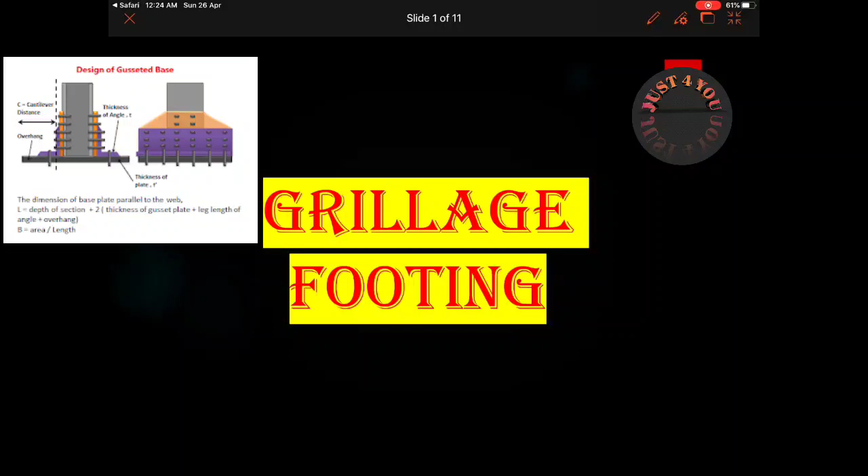Hello students, in this video lecture we will study about grillage footing. This is your last topic on the column base design of unit 3. We have studied about slab base, we have studied about gusseted bases also. For lighter loads we use slab base and for heavier loads we use gusseted base.

So why are we studying grillage footing? To answer that, I have 2 points. First, when the loads on the column are extremely heavy, like in the case of tall buildings, we need to increase the dimensions of the base plate to accommodate that load. That will not be a feasible idea to implement.

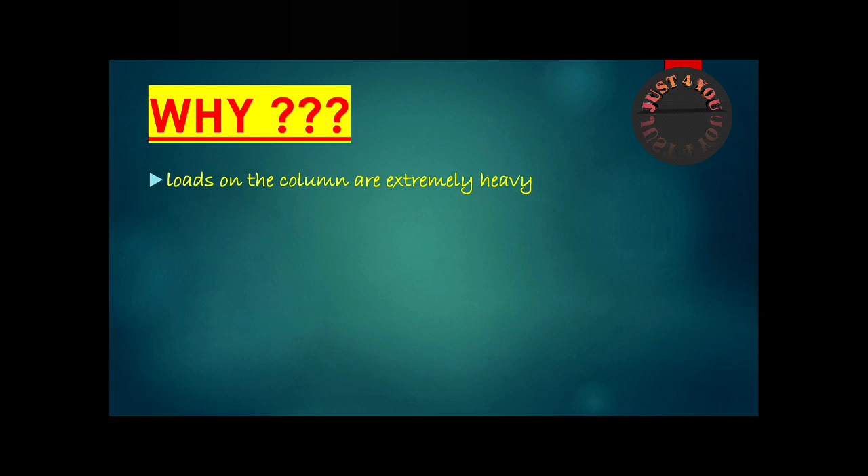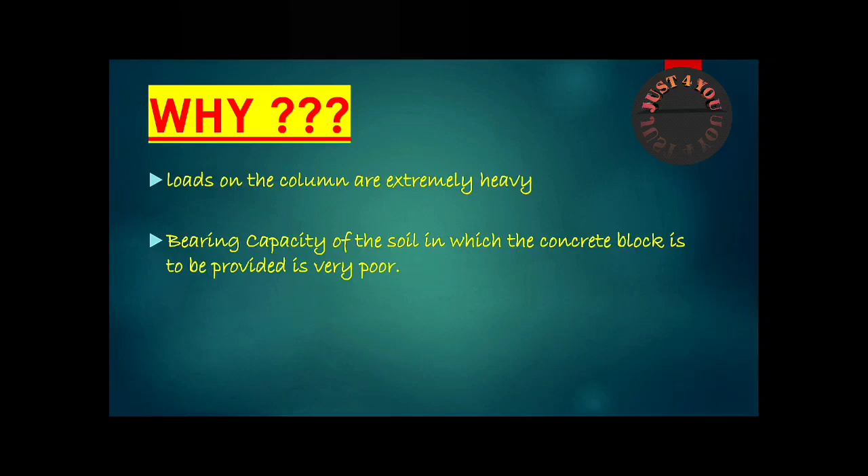Second, if the bearing capacity of the soil is poor, the concrete block placed over the soil may fail. To overcome this we need to change its dimensions or make it thicker, but by doing so we make it an uneconomical option. So based on these 2 points, we need to design a system so heavier loads can be easily accommodated with economical preference.

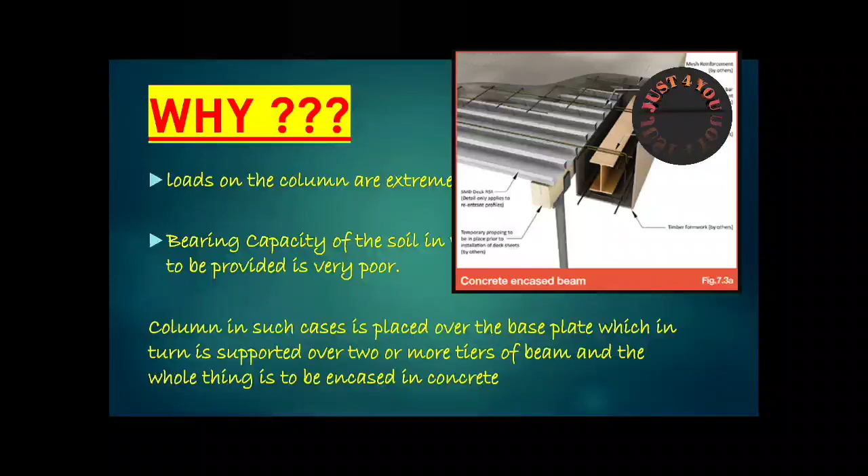So we design grillage footing. In grillage footing, the column is placed over the base plate, and the base plate is supported over a tier of beams, with 2 or more tiers of beams, and the whole thing is encased with concrete. Like your phone is covered with a case for protection, similarly the beams are encased, meaning covered with concrete, and over it the base plate is placed and the column is supported by this system.

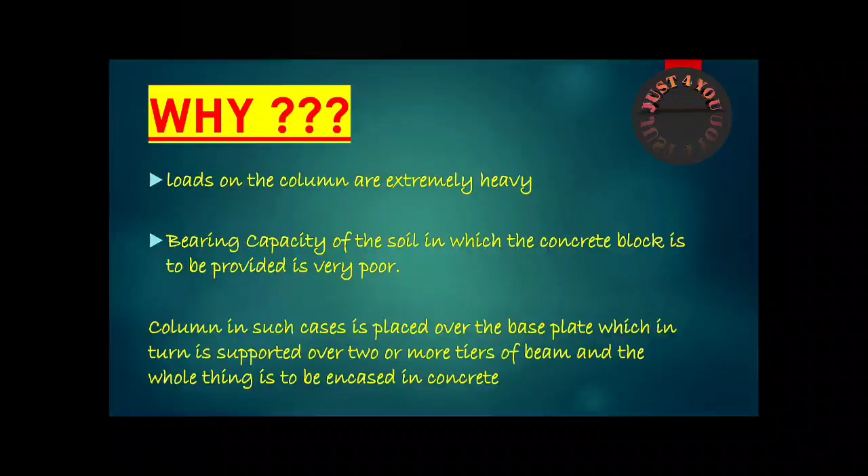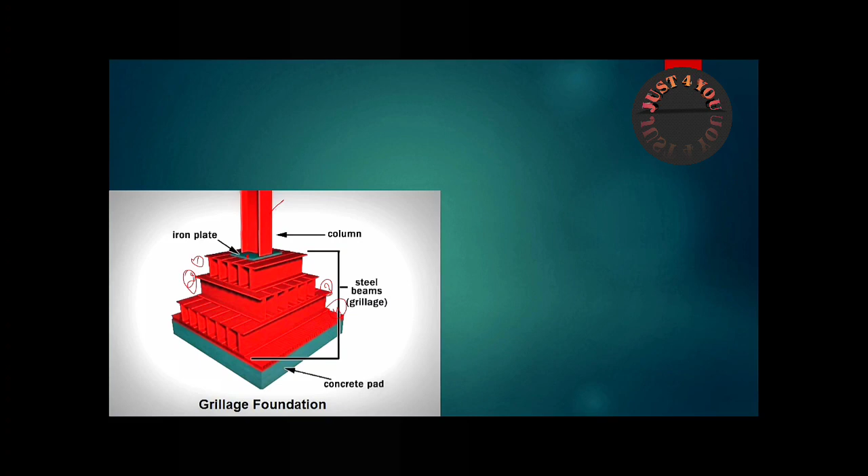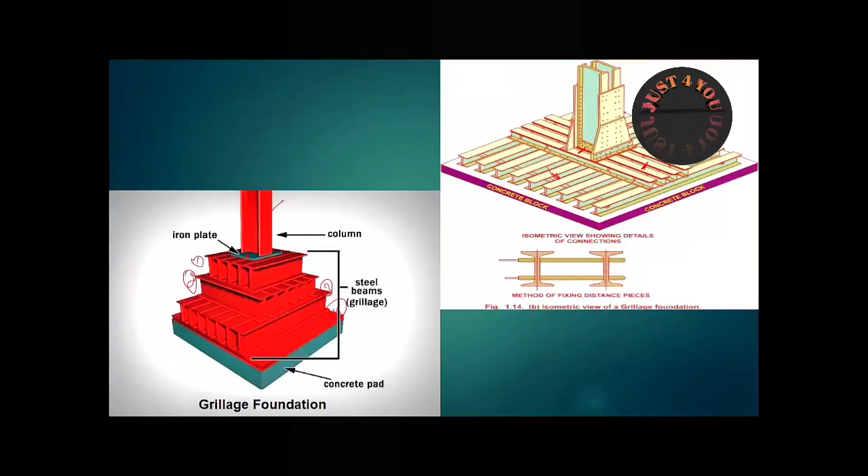Now there are some specifications given for designing this grillage footing or tier system. First, the beam should be unpainted and solidly encased in concrete with 10 mm aggregate and a working cube strength of not less than 15 Newton per mm square in 28 days. This means the concrete used for encasing the steel beams should be of strength 15 Newton per mm square with an aggregate size of 10 mm. So the minimum grade of concrete is M15, and the beam should not be painted, because otherwise it cannot bond with concrete effectively.

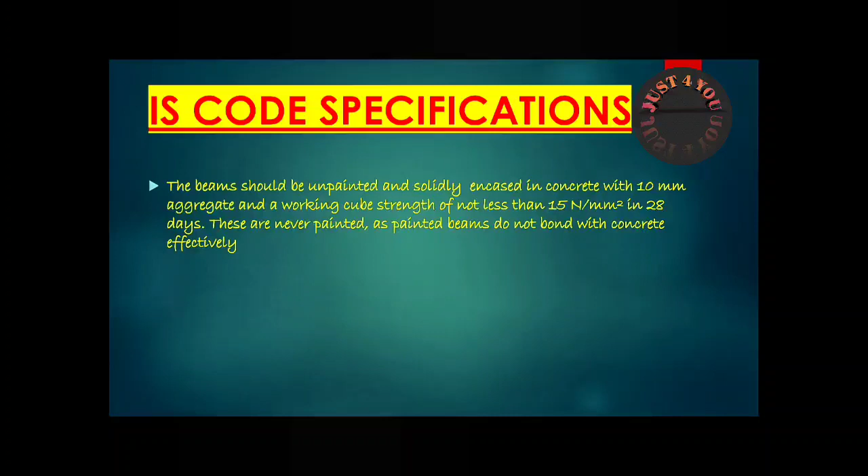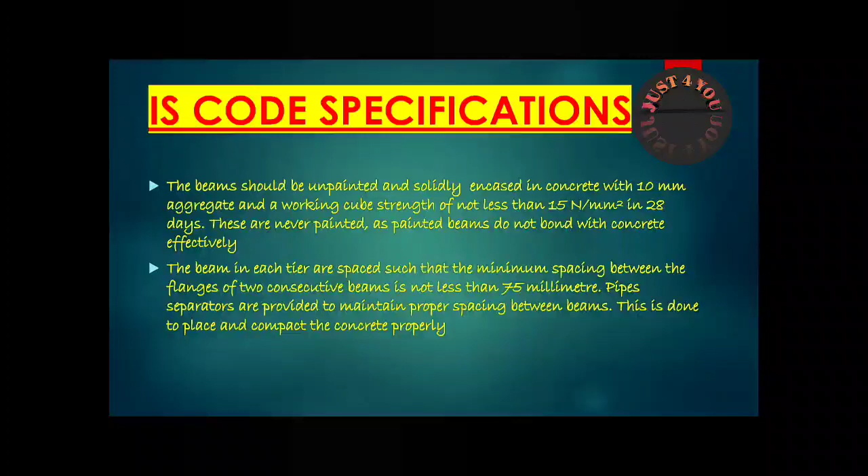The second specification is that the minimum clear spacing between 2 consecutive tier beams should not be less than 75 millimeter, and this is done to place and compact the concrete properly. The third specification is that we need to provide a cover of 100 mm minimum all around the tier beam arrangement. So these are the three specifications given by the Indian standard.

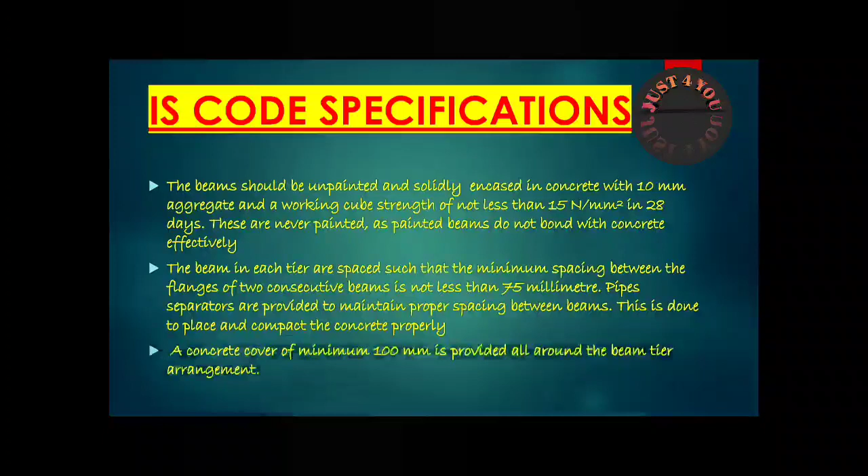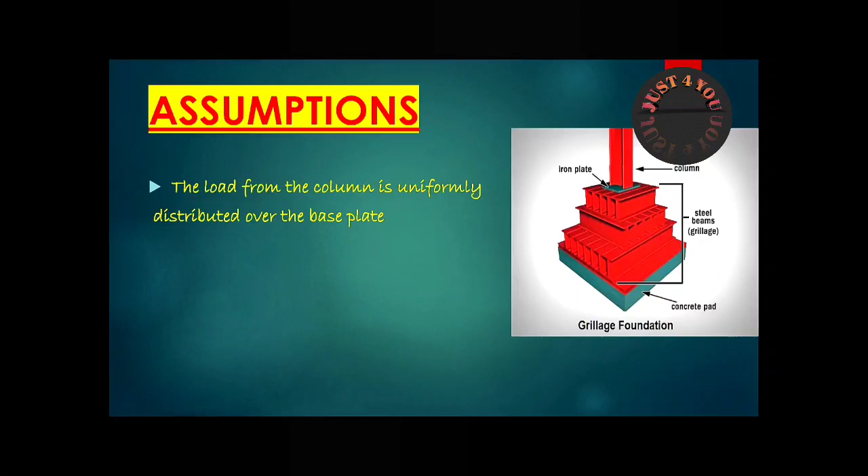Now before designing, we need to assume some points for grillage foundations. The first is that the load from the column is uniformly distributed over the base plate. Yes, all the load given by the column is uniformly distributed over the base plate. That is our first assumption.

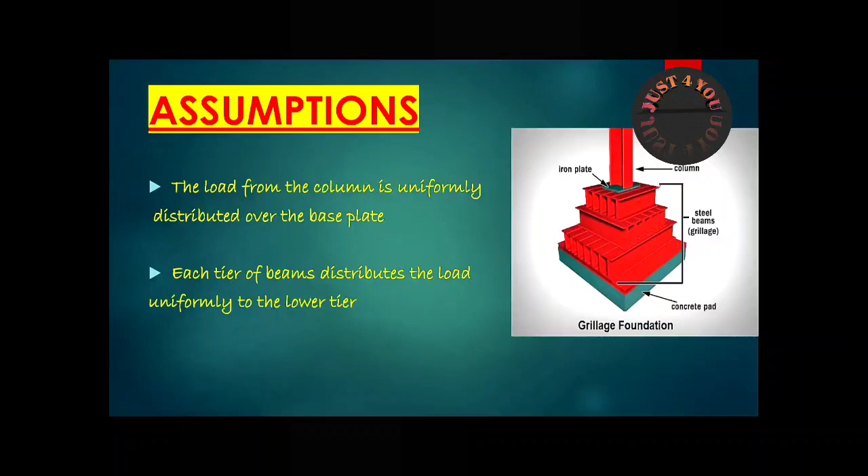The second assumption is that each tier of beam distributes the load uniformly to the lower tier. So if this is the first tier beam system, it distributes the load to the lower tier beam system uniformly. The third assumption is that the intensity of the bearing pressure is uniform, meaning the pressure from here to the concrete pad is uniform. So these are the three assumptions we make before designing.

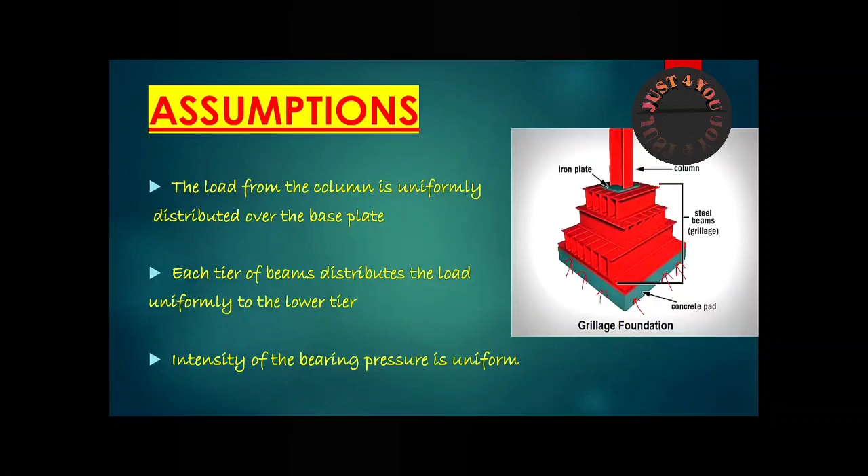Now let's go to the design part, but before that we need to understand design forces. Since we are talking about beams, there are two commonly forces that act on a beam: the first is bending moment and the second is shear force.

Similarly, for grillage foundation design forces, we can calculate the maximum bending moment for upper tier beams and lower tier beams using these equations. You can see here, these are the equations, where capital L and capital B change, and small a and small b change. Now for the nomenclature: P is the load in the column, A and B are the length and width of the base plate respectively, capital L is the length of the upper tier beam, and capital B is the length of the lower tier beam.

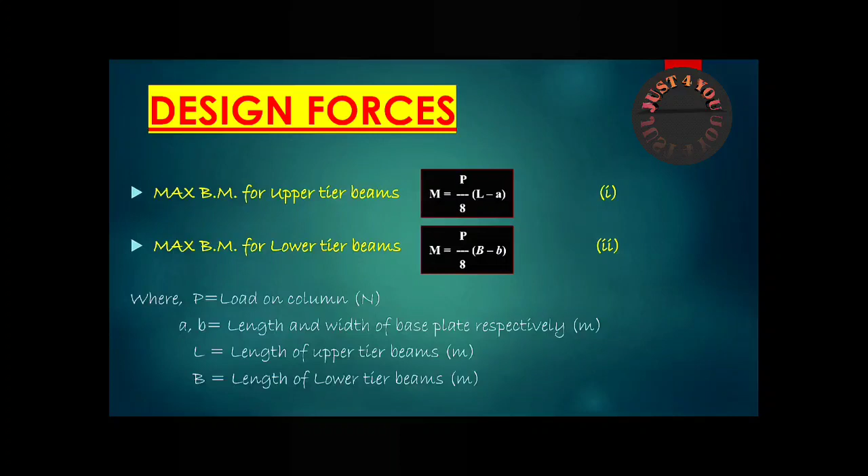Similarly, we can find the shear force. The shear force for the upper tier beam is calculated by 1/n times P/2 times (L minus small a) upon capital L. Similarly for lower tier beams, L is replaced by capital B, and the equation remains the same. Here n is the number of beams.

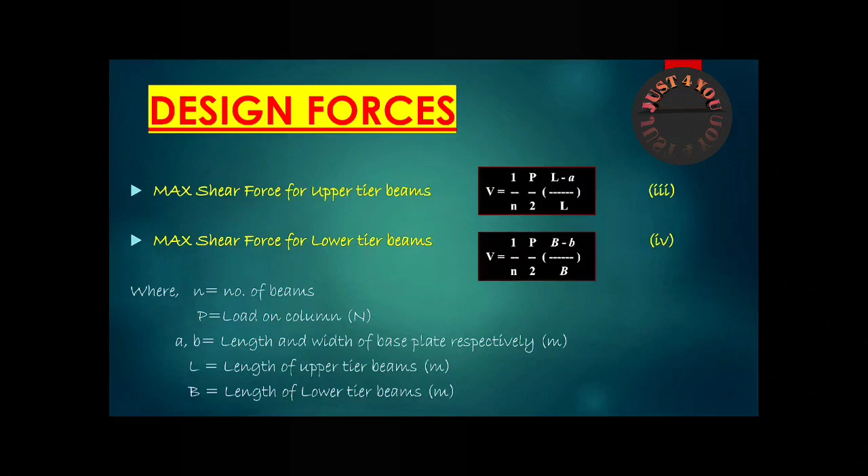So we are using these four equations in our design steps. Now let's go to the design steps.

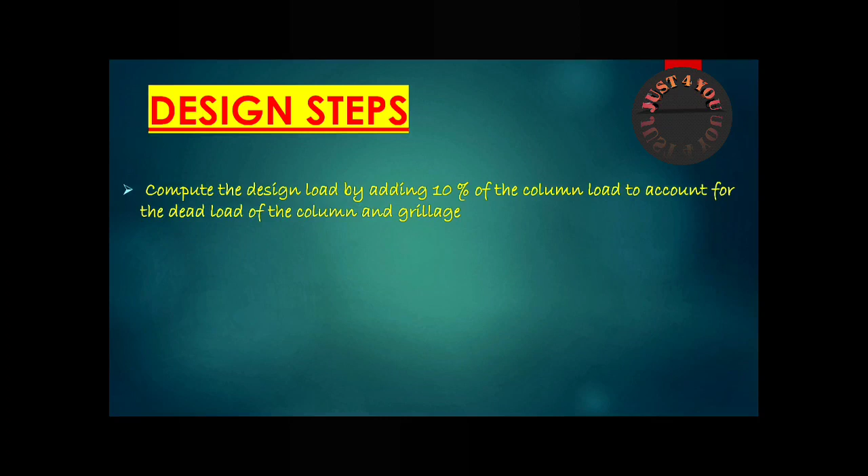The first step is to compute the design load by adding 10% of the column load to account for the dead load of the column and grillage. We need to add this 10% to get the design load.

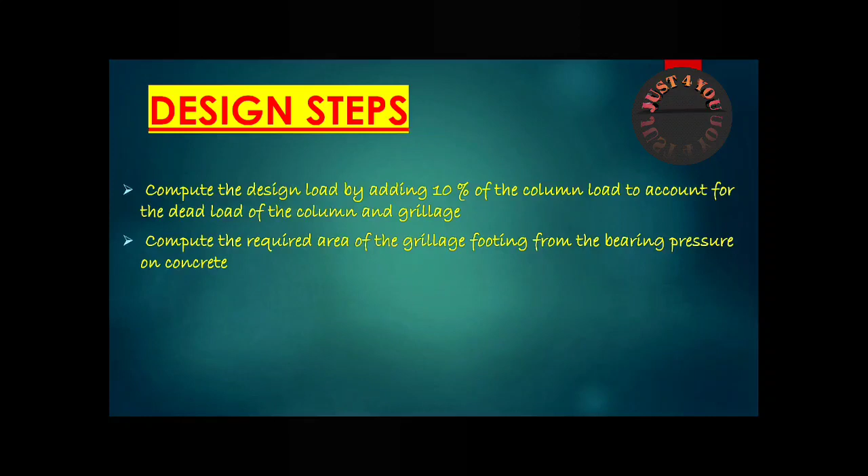The second step is to compute the required area of the grillage footing from the bearing pressure on concrete. Since in the first step we got the design load by adding 10% for the dead load of column and grillage, we can calculate the required area by dividing it by the bearing pressure of the concrete. If we provide a square base plate, we can also find its dimensions. That's how we proceed in grillage footing design, by providing a square base plate.

In the third step, we will find the maximum bending moment for the upper tier beam using equation one, that is M equals P/8 times (L minus A).

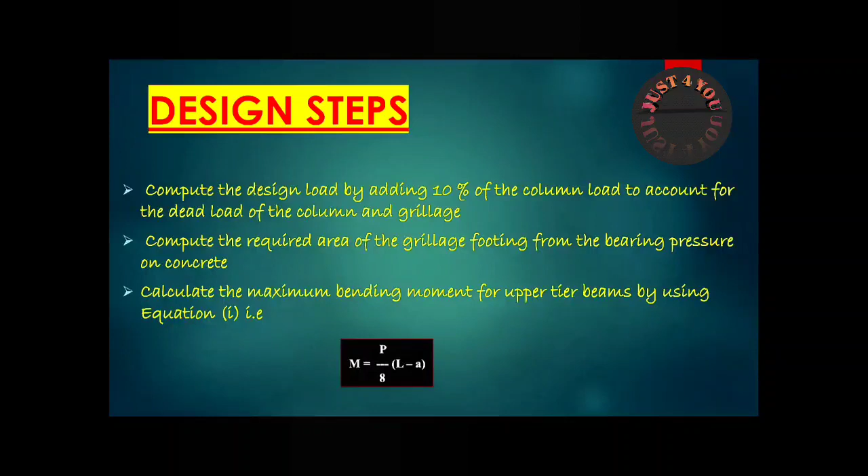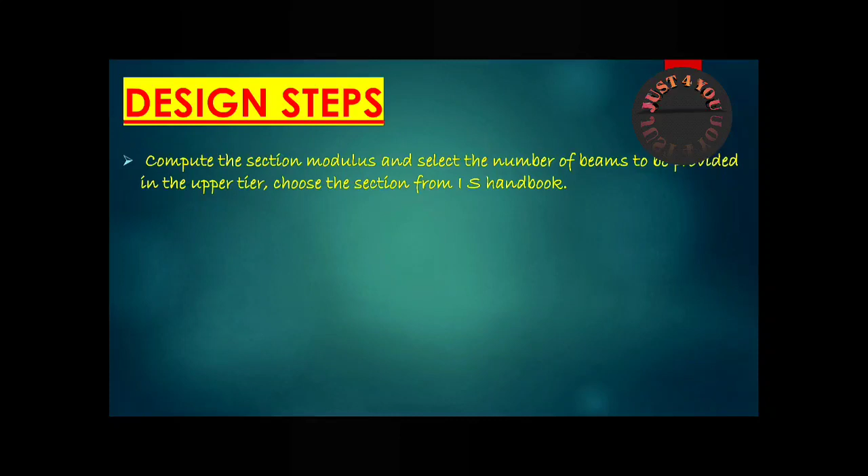In the fourth step, we will calculate the section modulus and select the number of beams to be provided in the upper tier by choosing a suitable section from the IS handbook, or steel table. This totally depends upon the section modulus.

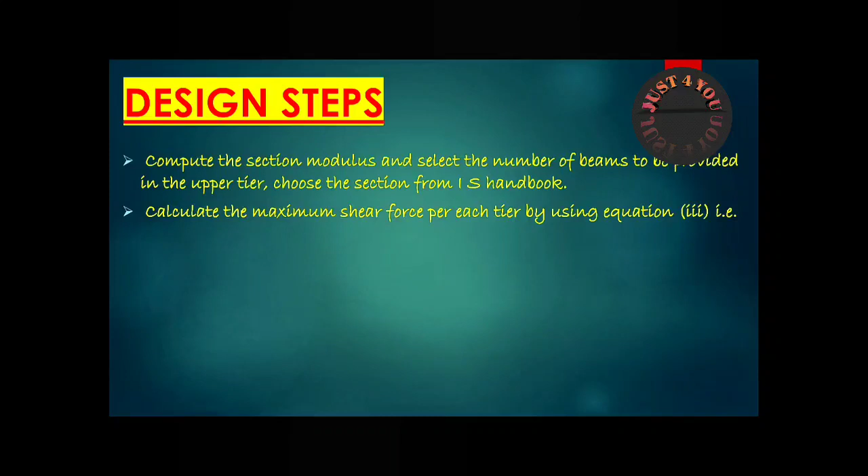In the next step, we will calculate the maximum shear force per tier using equation three, that is V equals 1/n times P/2 times (capital L minus A) upon capital L.

In the next step, we will check the beam for shear and crippling as per IS code.

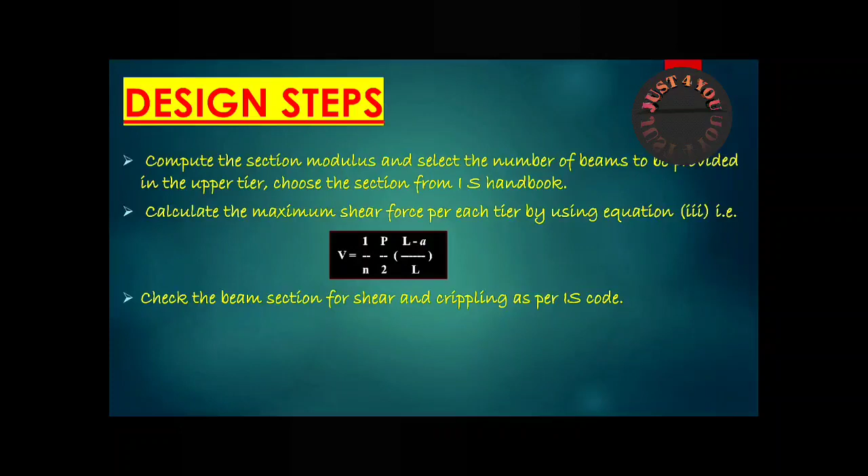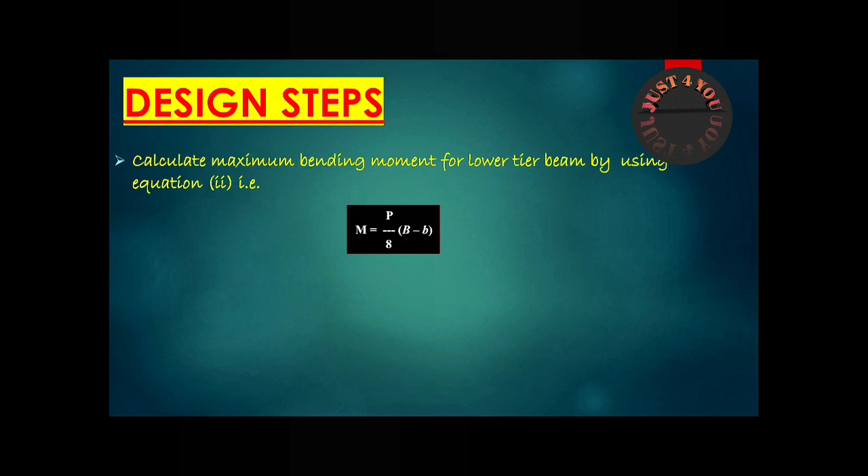Next, we will calculate the maximum bending moment for lower tier beams. Here is the equation: M equals P/8 times (capital B minus B). After that, we'll calculate the section modulus and select the number of beams to be provided from the steel table.

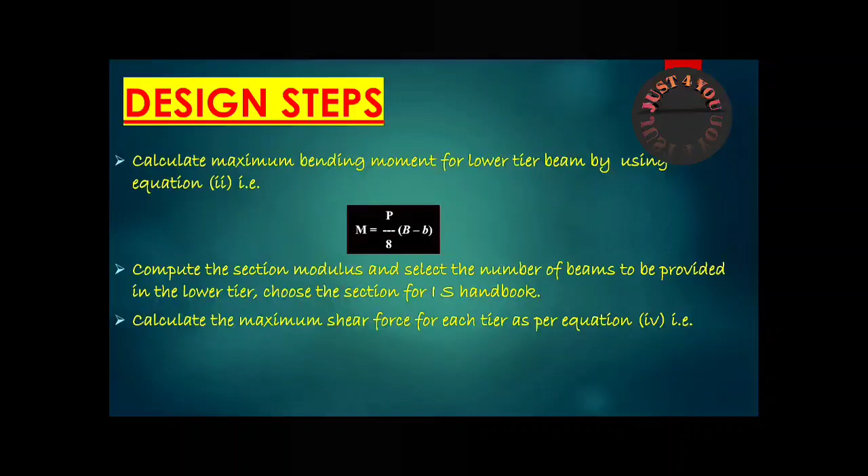Then we will calculate the maximum shear force for each tier as per equation four, that is V equals 1/n times P/8 times (capital B minus small b) upon capital B. The last step is to check the beam section for shear and crippling. That's how a grillage footing is designed.